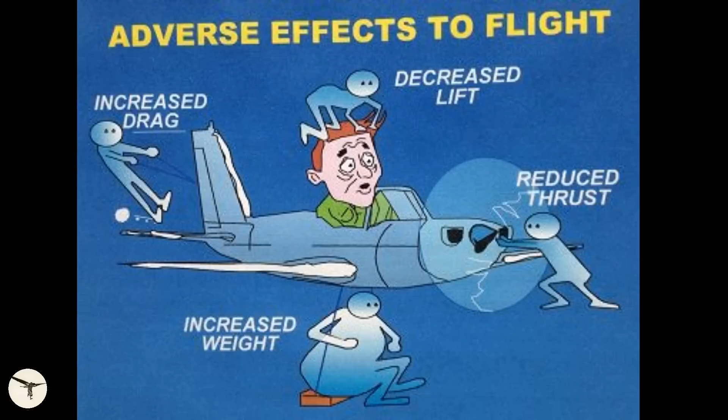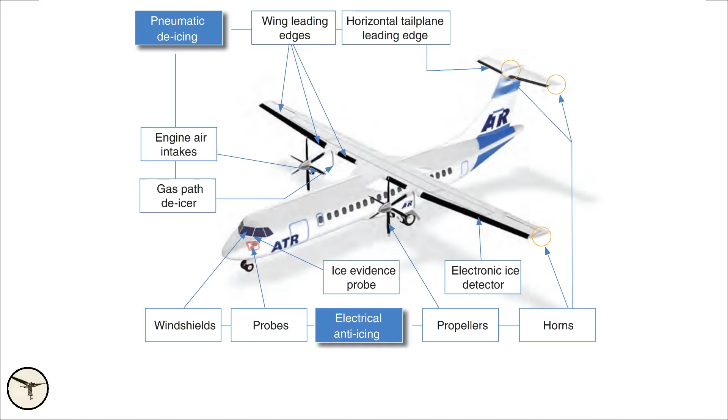Ice accumulation on an aircraft will add weight and drag, and it will reduce the thrust, and since it alters the wing profile, it reduces the lift, and the wing will stall at a lower angle of attack. Aircraft certified for operating in icing conditions are therefore equipped with ice protection systems. They protect the most important areas like air data probes, wings, tail, air intakes, and propellers.

And this video here explains how it works on ATR aircraft.

Icing conditions are classified into four groups: trace, light, moderate, and severe. Trace ice is when the rate of accumulation of ice is slightly greater than the rate of loss of ice due to sublimation. Light icing is when the rate of ice accumulation may create a problem if the accumulation continues for more than 1 hour.

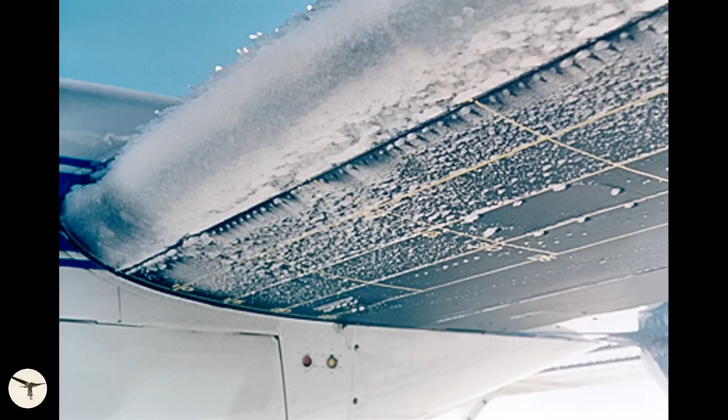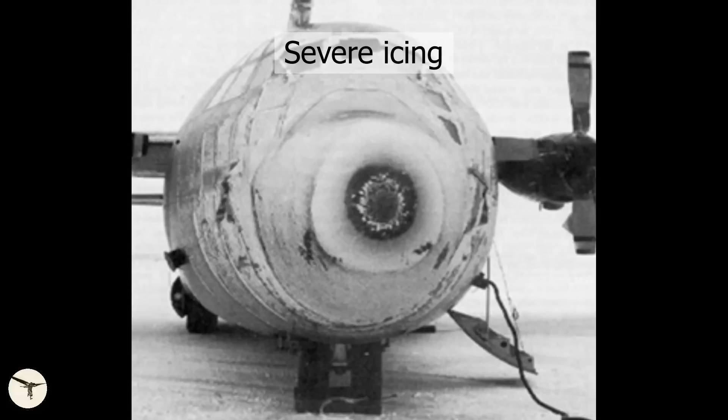Moderate icing is when the rate of accumulation is such that even short encounters become potentially hazardous. Severe icing is when the rate of accumulation is such that de-icing and anti-icing equipment fails to reduce or control the hazard, and immediate heading or altitude change is required.

You might be surprised to hear that moderate icing is a safety hazard. Well, here's a report from Aviation Herald about an incident that happened just a couple of weeks ago.

An Air Canada Bombardier C-Series CS300, which is now known as the Airbus 220, registration Charlie Golf Whiskey Uniform Tango, performing flight AC-1074 from Denver, Colorado, United States, to Montreal, Quebec, Canada, was on final approach to Montreal's runway 24 right. An Air Canada Rouge Airbus...

A319-100, registration Charlie Golf Bravo Hotel Yankee, performing flight RV 1597 from Halifax, Nova Scotia, to Montreal, Quebec, was on final approach to runway 24 right behind Charlie Golf Whiskey Uniform Tango. The Canadian TSB reported that there was moderate icing between 2,200 and 8,000 feet. The A319 encountered a significant increase in ice accumulation while descending through 3,000 feet.

AC-1074 slowed down, prompting the controller to request RV-1597 to slow down too. However, the required separation of 3 nautical miles between the two aircraft was lost and reduced to about 2.1 nautical miles. The controller instructed RV-1597 to go around.

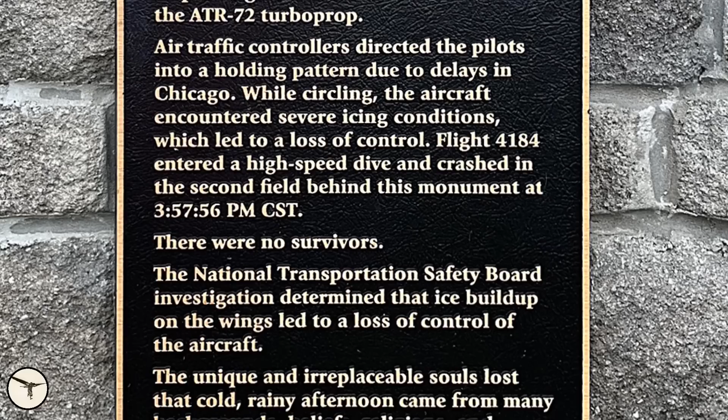Air traffic controllers directed the pilots into a holding pattern due to delays in Chicago. While circling, the aircraft encountered severe icing conditions, which led to a loss of control. Flight 4184 entered a high-speed dive and crashed in the second field behind this monument at 3:57:56 p.m. Central Standard Time. There were no survivors.

The National Transportation Safety Board investigation determined that ice buildup on the wings led to a loss of control of the aircraft. The sequences that led up to the accident are well documented by Disaster Breakdown.

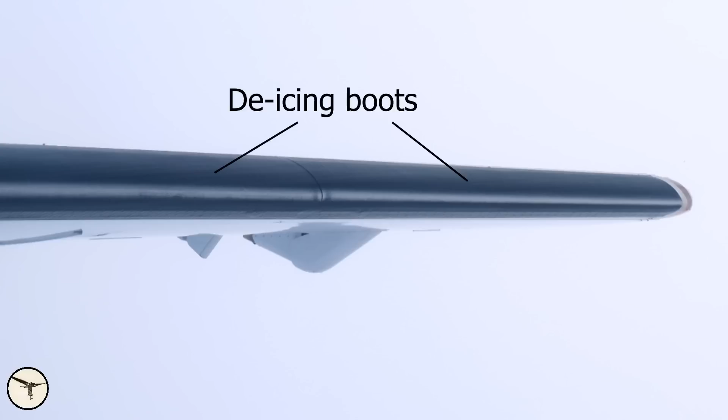Turboprop aircraft like the ATR are equipped with pneumatic de-icing boots. They are made of bladders that alternately inflate and deflate, thus breaking away the ice. In this picture, the ice accumulation is very small, so the ice will barely break away.

When the drops are 50 microns or larger in diameter, that is 0.05 mm, we have freezing drizzle. And when the drops are 500 microns or larger, we have freezing rain. They are called supercooled large drops, SLD. The larger the drops, the longer time it will take for them to freeze. So when they hit a wing, the drops will flow along the surface of the wing while freezing.

Until 2015, no new aircraft types in the transport category were certified to fly in SLD, which is freezing drizzle and freezing rain. The crew of Air Canada Rouge Flight 1597 understood this and decided to land even when this resulted in a reduced separation, because it was more safe.

The ailerons are used to control the roll. When we move the control wheel to the right, the aileron on the right side moves up, reducing the lift on that side, while the left aileron moves down, increasing the lift on that side. This creates a rolling moment, and vice versa.

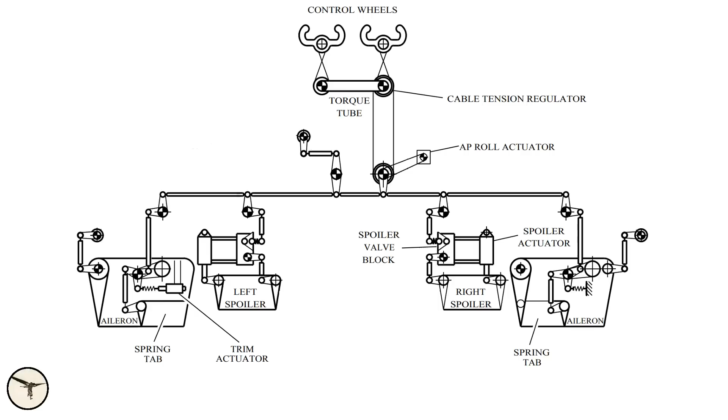Turboprop aircraft like ATR, Dash 8, Fokker 50, Saab 340 have manually operated ailerons. While this makes the design lighter and less complex than hydraulically boosted ailerons, it makes the aircraft prone to what we call uncommanded aileron deflection.

Let me explain. In normal flight, the ailerons are balancing each other out, which means the hinge moment on one aileron is compensated by the hinge moment of the opposite aileron. The net force on the pilot's control column is therefore very low. But in case of an uneven lift distribution over the wings, for example because of turbulent airflow, the hinge moment on one side will change significantly, causing the ailerons to deflect by themselves, resulting in an uncommanded roll. And this aerodynamic force can overpower the pilot.

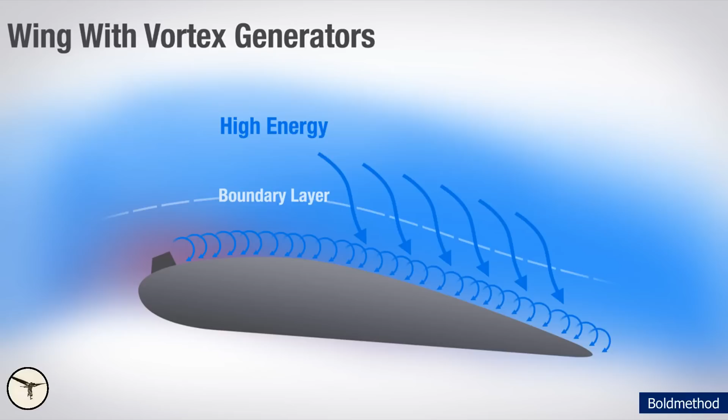A vortex generator is a small vane attached to the surface of a wing, stabilizer, or control surfaces such as flaps, elevators, ailerons, and the rudder. The vortex generator creates a vortex which delays local flow separation and aerodynamic stall. This makes the wings, stabilizers, and control surfaces more effective.

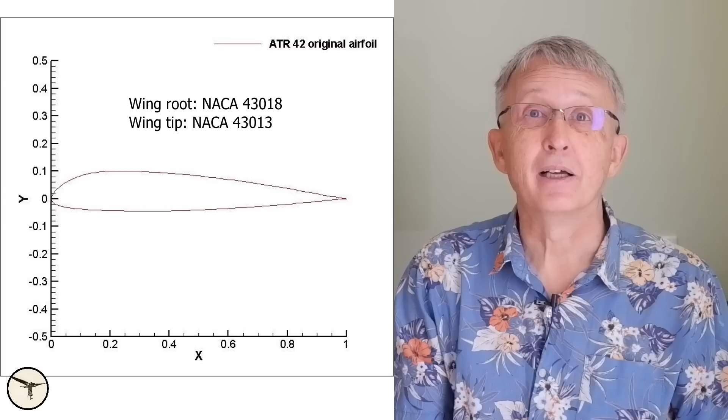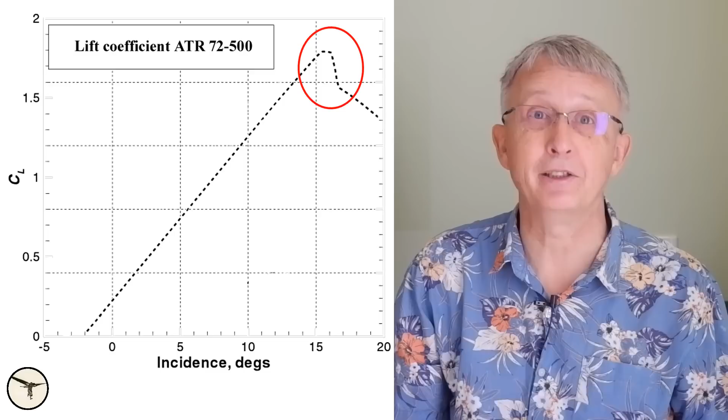The ATR wing is a non-laminar flow design. NACA 43-018 profile is used at the wing root and NACA 43-013 at the wingtip. The wing provides high lift and low drag, but it has a relatively abrupt stall behavior, which is indicated by the sharp drop in the lift curve.

The ATR 42 was certified in 1985. At that time, the wings did not have vortex generators. When ATR later developed the ATR 72, it was discovered that uncommanded aileron deflection could happen at an angle of attack that ATR deemed to be too low. The solution was to add vortex generators on the upper wing surface, in front of the ailerons. This delayed the uncommanded aileron deflection to 25 degrees angle of attack, which is well beyond the stall.

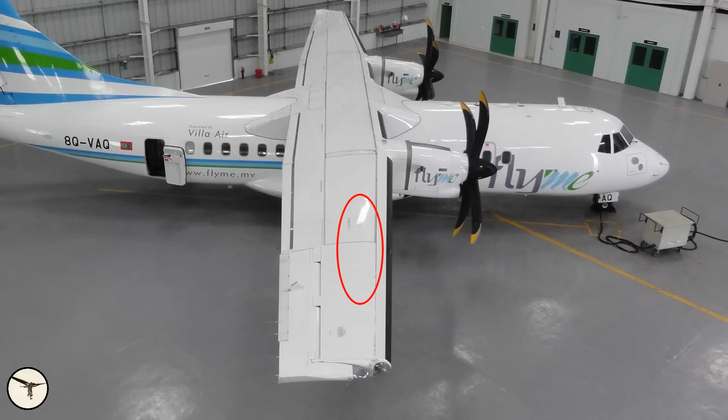Earlier, there had been some incidents with ATR 42 experiencing uncommanded aileron deflection in icing conditions. As a response, ATR added vortex generators to the ATR 42, which was approved by the French aviation authorities, DGAC, in 1990 and by the FAA in 1992. But when ATR wanted to change the AFM, Airplane Flight Manual, and FCOM, Flight Crew Operating Manual, to describe the purpose of the vortex generators, some authorities said no, it's not necessary. The French DGAC stated they did not require the changes because they addressed a condition outside the certification envelope. Likewise, the FAA considered that the vortex generators would remove the source of the abnormal aileron behavior. However, the Canadian and German CAAs both implemented the changes.

While some aircraft have a reputation of being able to carry a ton of ice, the ATR is more sensitive. The wing doesn't like ice contamination that much, but this is nothing new.

Enter the Quickie. It was designed by Burt Rutan and friends. The Quickie has a low horsepower but high cruise speed, and it became popular among home builders. A friend of mine had a single-seat version of the Quickie, and he told me that rain caused water drops to stick to the canard wing, and this made it impossible to take off.

The ATR wing is not affected by rain, and the de-icing boots are very effective because they are lined chordwise. ATR is also equipped with an automatic ice detection system, alerting the pilots when ice forms on the airframe. The aircraft also has an ice evidence probe outside the captain's side window, showing the extent of ice on unprotected surfaces.

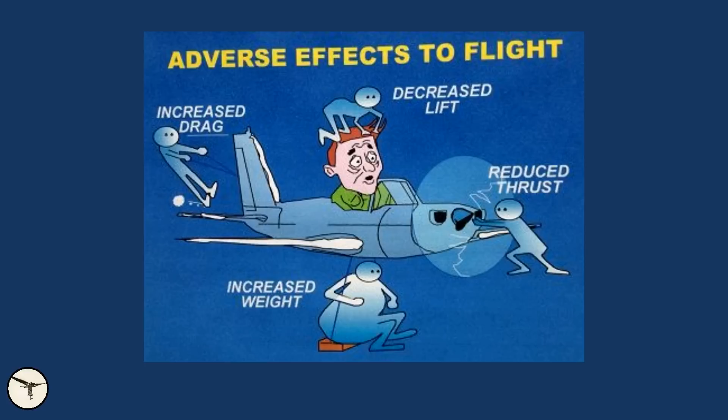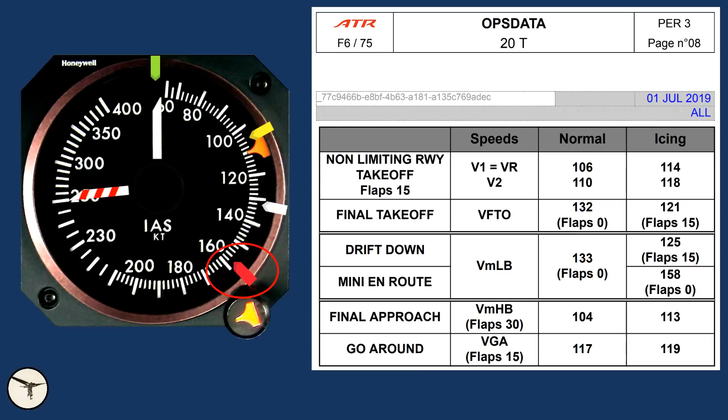Minimum speed with flaps retracted is 133 knots in normal atmospheric conditions and is marked with a white bug on the airspeed indicator. Minimum speed with flaps retracted in icing conditions is 158 knots and marked with a red bug on an analog airspeed indicator and an amber bug in aircraft with a glass cockpit. After the introduction of the -600, it is now called the icing bug.

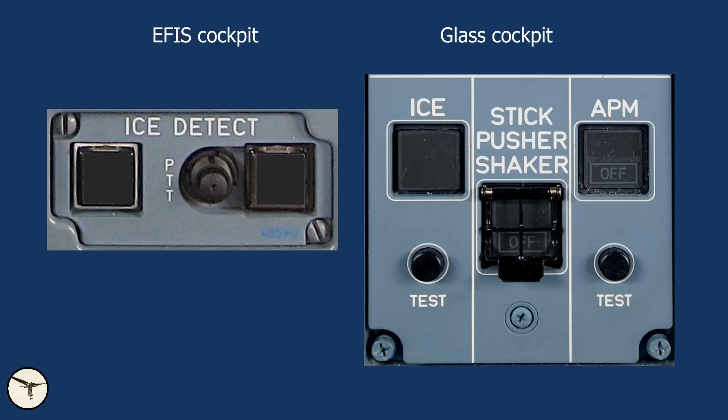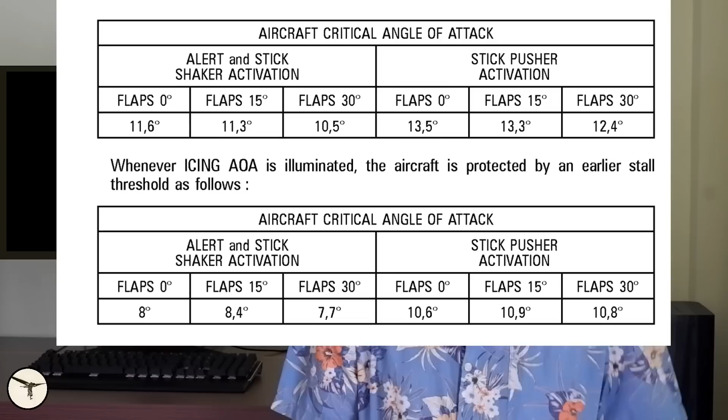When we activate the anti-icing systems, the stall protection system changes mode from normal conditions to icing conditions. In normal conditions, the stall alert system in an ATR 72-210 will trigger the stick shaker at 11.6 degrees angle of attack. At 13.5 degrees angle of attack, the stick pusher is activated. And this is how we test the stick shaker and pusher.

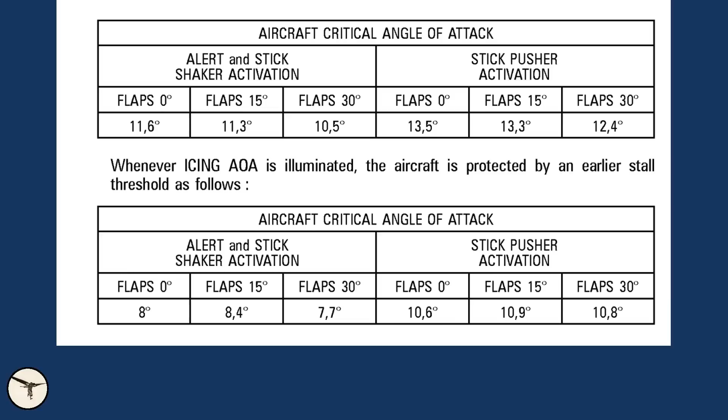Therefore, when the stick shaker is activated, the aircraft is still under control. In icing conditions, the stick shaker is activated at 8 degrees angle of attack and the stick pusher at 10.6 degrees angle of attack. Once we were familiar with the ice protection systems and the procedures, we proceeded to severe icing. During the training, we learned how to recognize severe icing and how to escape it.

Here are some clues to identify severe icing: there will be splashing water on the windscreen, you have loss of performance, there is an excessive accumulation of ice on the ice evidence probe and the side windows. This happened to me once, not in Norway, but in tropical Thailand.

This was a flight from Bangkok to Yangon in Myanmar. When we were on the border between the countries, we saw a large cloud formation ahead of us. We could not climb above it, and it was too wide to circumnavigate. The weather radar showed green over a large area, so we didn't expect much ice.

Before we entered the cloud, the anti-icing systems were switched on. After a while, the ice detector was triggered, and we switched on the de-icing systems. All systems worked normally. Shortly after, water started to splash on the windscreen.

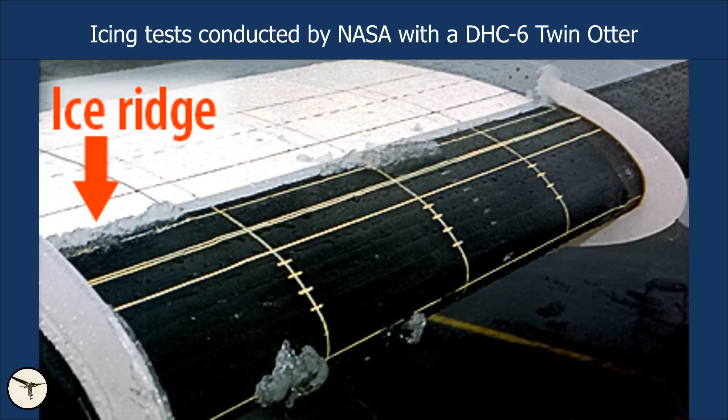This caused ice to form behind the de-icing boots. This ice ridge was not even, but formed and broke off at irregular intervals. This led to turbulent airflow over the wing, a recipe for uncommanded aileron deflection.

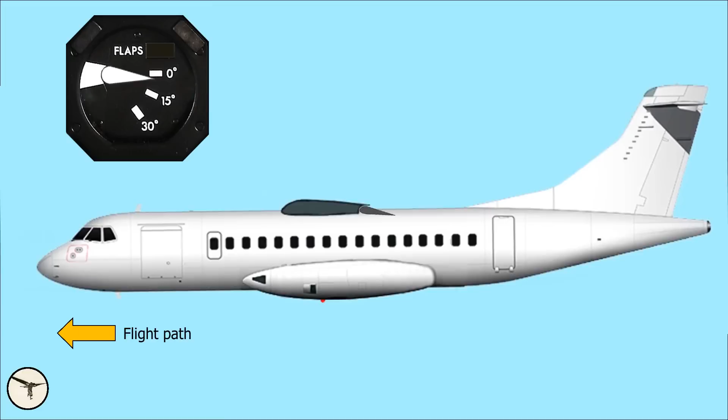When the crew then retracted the flaps, the aircraft started to pitch down, and this was compensated by lifting the nose, increasing the angle of attack. When the angle of attack exceeded 5 degrees, control was lost. Therefore, the stall warning system was not triggered.

Just to be clear, the aircraft did not stall. Control was lost when the ailerons were forced to full deflection. When the pilot reduced the back pressure on the control column, the angle of attack decreased and he regained control of the aircraft. But this caused the aircraft to pitch down.

So the pilot pulled up again, and this caused the angle of attack to increase and control was now lost. The aerodynamic forces acting on the ailerons were stronger than the pilot's.

This accident highlighted a problem. While a transport category airplane is certified for flight in icing conditions, it is the pilot's responsibility to ensure that the airplane is operated within the certified icing envelope.

At the time ATR 42 and 72 were certified, the requirement was that the aircraft can operate safely in icing conditions where the water droplet size does not exceed 50 microns. But how can a pilot distinguish water droplets of 50 microns from larger drops?

The National Transportation Safety Board, NTSB, concluded that the aircraft was certified in accordance with the regulations in JAR Part 25, that's for Europe, and FAR 25 for the US. But the certification standards for transport category aircraft did not address icing caused by supercooled large drops, SLD.

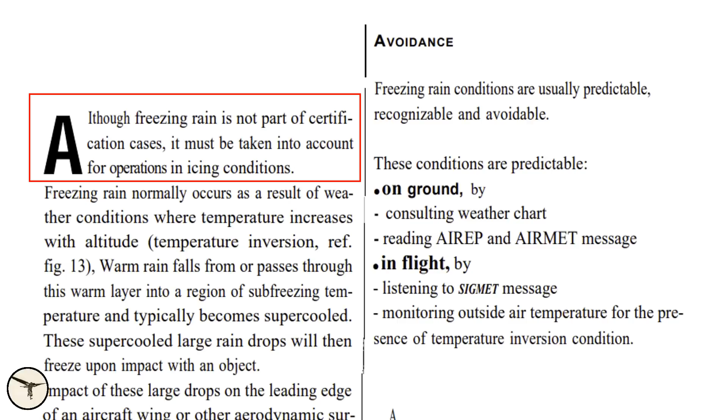In 1992, ATR issued a brochure entitled All-Weather Operations. It contained information regarding operation of the ATR airplanes in icing conditions. In this brochure, ATR stated, quote, 'Flight in freezing rain is not part of certification cases. It must be taken into account for operations in icing conditions. And flight in freezing rain should be avoided where practical,' end quote.

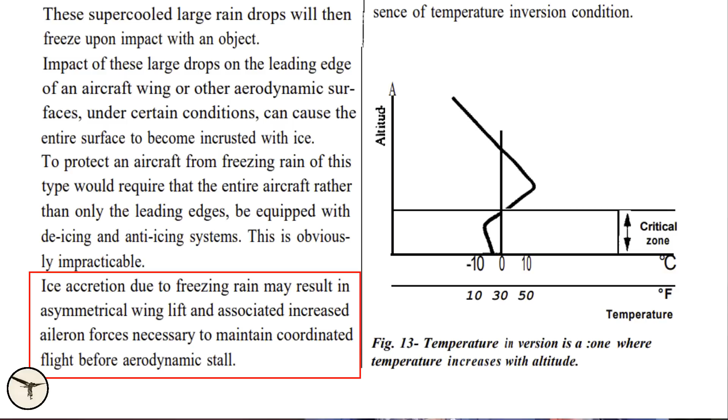The brochure also gave the following warning: ice accretion due to freezing rain may result in asymmetrical wing lift and associated increased aileron forces necessary to maintain coordinated flight before aerodynamic stall. ATR distributed the brochure to all ATR operators, and also attempted to send a copy directly to all ATR pilots. But Simmons Airlines did not distribute the brochure to its pilots. The reason was that they considered some of the information to be contrary to the Federal Aviation Regulations. However, some of the information from the brochure was later included in the company's manuals.

The operations manual stated that the dispatch of airplanes shall be conducted to avoid flight into freezing rain conditions, but neither the flight manual part 1 nor the AOM stated that flight in freezing rain should or must be avoided, as stated in the ATR AFM.

On the 6th of January 1989, Simmons Airlines issued a memorandum to the pilots entitled Flight into Icing Conditions. It stated, quote, 'Our aircraft are not to be operated in known freezing rain or severe ice.'

On the 15th of November 1991, the company distributed a memorandum entitled Flight Operations in Freezing Rain. It stated: 'It is emphasized that aircraft ice protection systems are designed to cope with the supercooled cloud environment, not freezing rain. Large droplets, 1,300 microns, of freezing rain impact much larger areas of the aircraft components and will in time exceed the capability of most ice protection equipment.'

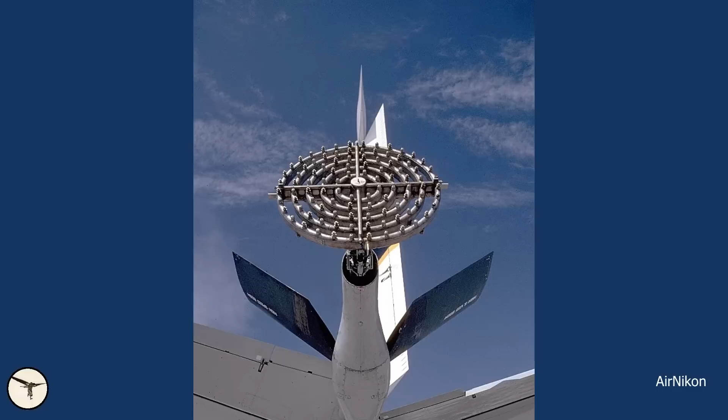At Edwards Air Force Base, the US Air Force had a Boeing NKC-135A Stratotanker modified to carry out icing tests. It was equipped with a boom with a spray nozzle that could produce a cloud of supercooled water drops of various sizes. In December 1994, a few weeks after the accident, an ATR-72 was flown behind the tanker, recreating the conditions experienced by Flight 4184.

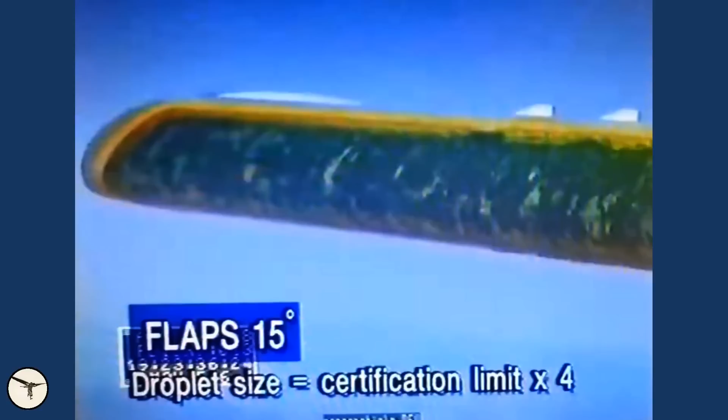Following those tests, ATR modified the upper part of the de-icing boots outside of the engines to extend further aft, from 7% to 12.5% MAC.

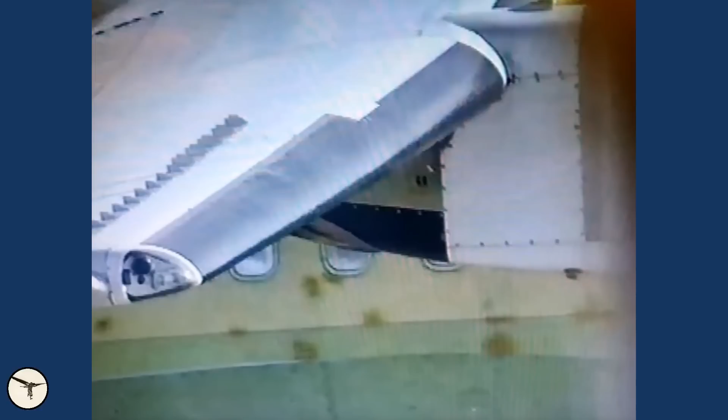An aircraft with the new de-icing boots was tested in March 1995. The test demonstrated that no ice formed aft of the new de-icing boots. All US registered ATR 42 and 72 aircraft were modified with the new boots before June 1995.

When ATR introduced the 42-500 and 72-500, they introduced a new computer, the APM, the Aircraft Performance Monitoring System, which compares actual aircraft performance with a theoretical model.

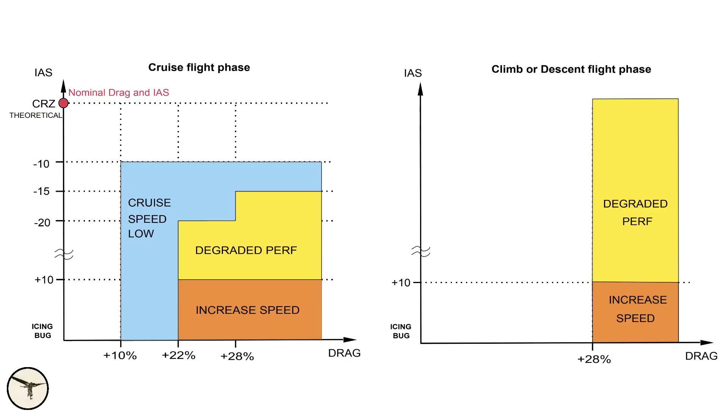It will alert the pilots when ice accumulation causes excessive drag. If the cruise speed drops 10 knots below normal cruise speed, the message 'cruise speed low' is triggered. If during cruise the drag increases by 22% or more, and the cruise speed is 15 to 20 knots below theoretical cruise speed, the message 'degraded performance' is triggered.

Or if during climb or descent the drag is 28% or more, and the speed is more than icing bug plus 10, degraded performance is triggered. This is an indication of severe icing, therefore action is required.

If the speed drops below icing bug plus 10 knots, the message 'increase speed' is triggered. And this is your last warning. Get your speed up or you will face the consequences. Almost every incident and accident related to icing happens because the pilots let the speed drop below the minimum operational speed while ignoring those signals.

The accident report stated that, at the time of the accident, it was common for pilots in the company to fly in holding with the flaps extended. After the accident, ATR emphasized that flying in holding with the flaps extended is prohibited, unless you're single engine in icing conditions.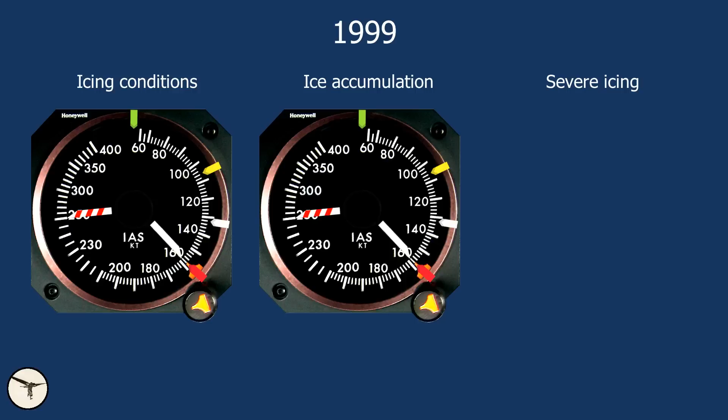ATR also revised the procedure for flight in icing conditions. When I learned to fly the ATR 42 in 1999, the procedure was: minimum speed in icing conditions, icing bug; minimum speed with ice accumulation, icing bug; minimum speed in severe icing, icing bug plus 10.

The simulators were upgraded to replicate severe icing. But there will be 2 more accidents with ATR 72 in severe icing: Trans-Asia Flight 791 in 2002 and Aero Caribbean Flight 883 in 2010.

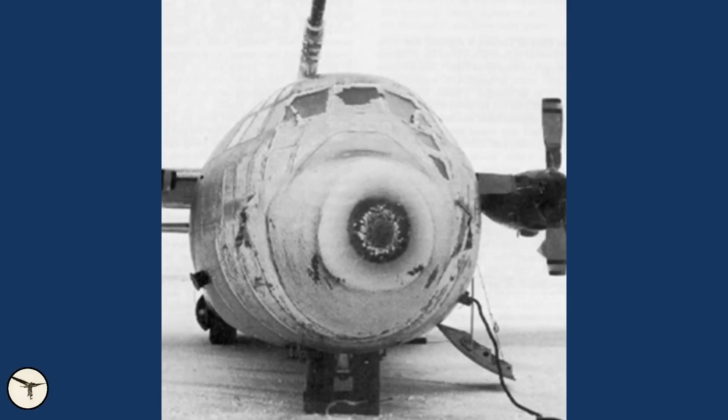In both accidents, the pilots let the speed bleed off below icing bug while they waited for clearance from ATC to descend. By doing so, they lost control. Severe icing is an emergency, just like an emergency descent. You don't have to wait for clearance. Just get down right away.

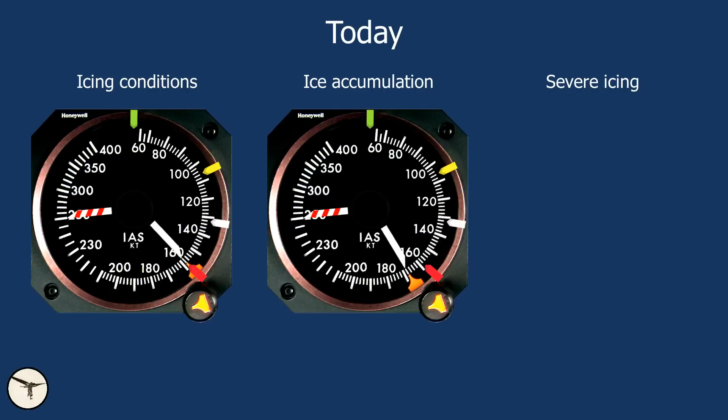After the second accident, ATR changed the procedures to the following: minimum speed in icing conditions, icing bug; minimum speed with ice accumulation, icing bug plus 10 knots; minimum speed in severe icing, icing bug plus 30 knots.

When it comes to icing, there are 3 things to remember: airspeed, airspeed, and airspeed.

Despite the introduction of the APM and the procedures becoming more and more conservative, there have still been incidents where ATR pilots have let the speed decay below the minimum operational speeds. I have made a video about just that. It's here, you will find a link in the description below.

So you might start to wonder, is this a problem with the aircraft or the pilots or both? What about other turboprop aircraft like Dash 8, Embraer 120 Brasilia, Saab 340? Are they immune to ice? No.

What all turboprop passenger aircraft in this size have in common are pneumatic de-icing boots and manually operated ailerons. While uncommanded aileron reversal is a rare occurrence, there have been icing-related accidents and incidents with those aircraft types. Here are some of them.

Embraer 120 in 1997, loss of control due to uncommanded roll during approach, fatal crash. Embraer 120 in 2001, loss of control during cruise resulted in loss of 8,000 feet and structural damage to horizontal stabilizer and elevator. Saab 340 in 2006, stalled and lost 5,000 feet.

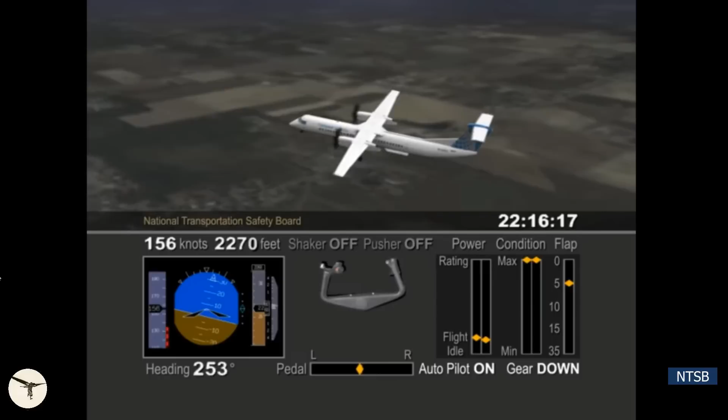In 2009, a Dash 8 Q400 crashed during approach. That was Colgan Air Flight 3407. Shortly after extension of flaps and landing gear, the stick shaker activated. The captain reacted by pulling the nose up and the stick pusher activated. But the captain overrode the pusher by pulling back on the control column, causing the aircraft to stall. At the same time, the first officer retracted the flaps.

The NTSB determined that the current stall training was not good enough. As a result, the aviation industry has revised the stall recovery procedure to be as following: push the nose down and increase power as required. Some aircraft types like the ATR require the flaps to be extended if it was in a retracted position before. Each action alone will break the stall, but lowering the nose is the most effective, as the angle of attack is instantly reduced.

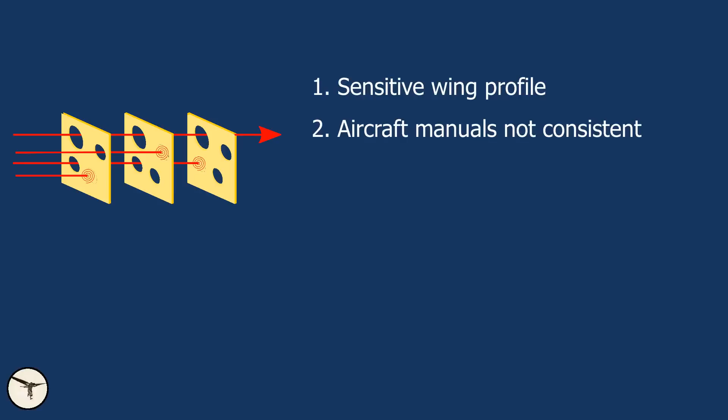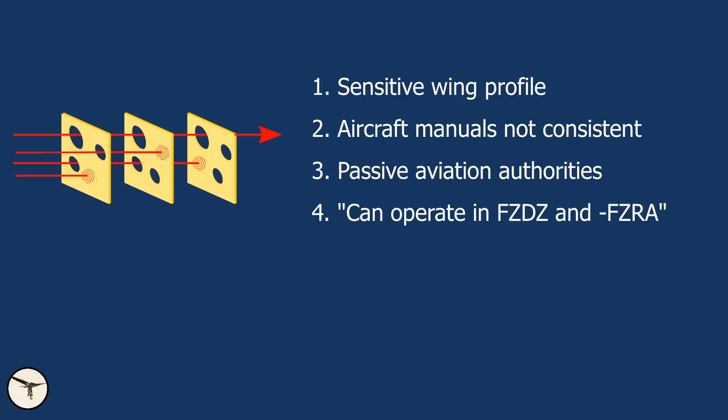Accidents do not happen because of a single cause, and American Eagle 4184 was no exception. I am sure you are familiar with the Swiss cheese model. In this case, we can list up the following threats and errors that led up to the accident. One, the wing is sensitive to ice. Two, the information in the aircraft manuals, AFM and FCOM, was not consistent. Three, passive aviation authorities. Four, a common belief that transport category aircraft are certified to operate in freezing drizzle and light freezing rain. Five, use of flaps in holding. Six, training might be a factor, especially when it comes to detecting severe icing.

When looking at ATR today, we see that a lot has been done to address those threats. There have been improvements to equipment, procedures, and training.

And that's all I have to say for this time. This video is already very long, but it could have been much longer. The accident report alone has more than 300 pages. But I think I have the essentials covered.